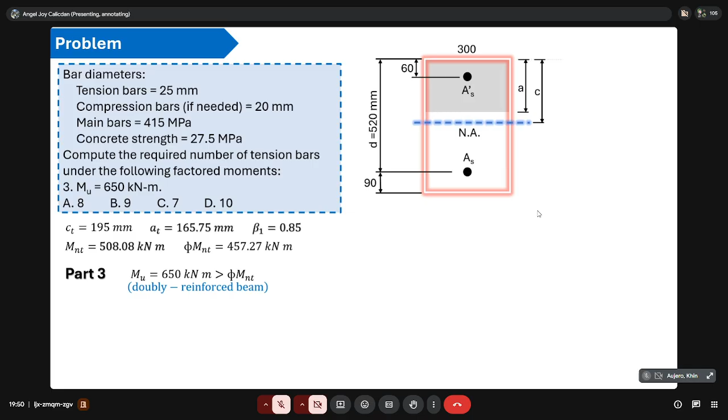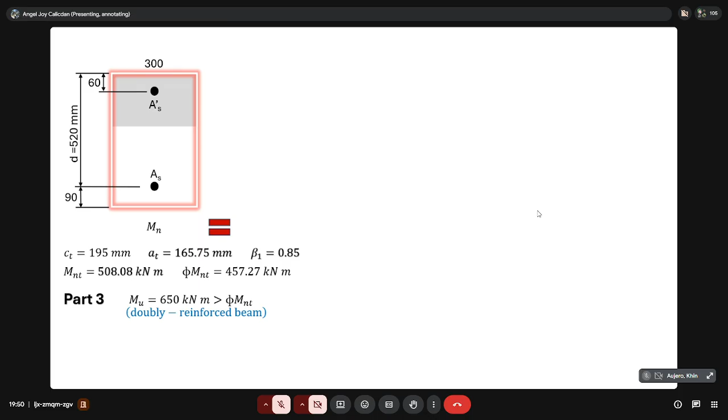For a doubly reinforced beam, given this cross-section of the beam, Mn, the nominal moment capacity, is equal to Mn1, which is just equal to Mnt, the tension-controlled moment, plus Mn2, which comes from the combination of As2 or As prime. But first, let's solve for Mn.

Since Mu is less than or equal to phi Mn, if we solve for Mn, we divide both sides by phi. So Mn is just Mu over phi: 650 over 0.9, and Mn equals 722.222 kilonewton-meter.

At figure 1, summation of horizontal forces: Cc equals T1. So we have 0.85 f'c times a, since tension-controlled throughout figure 1, times BW equals AS1 Fy. Fy is automatic here in figure 1 since it's tension-controlled, and tension-controlled means the steel yields.

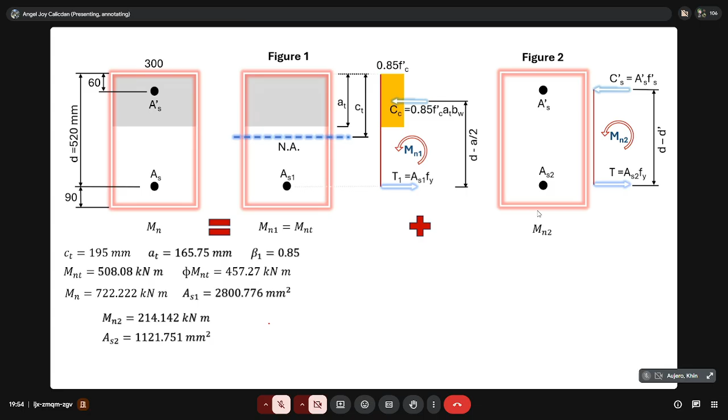But now for the compression bars, since it's doubly reinforced, we need to check if the compression bars actually yield. So to check, let's compute for Fs prime. Fs prime is 415.385 MPa, so it's just barely enough to yield. So we use Fs prime equals Fy.

Here in figure 2, summation of horizontal forces, to get AS prime: CS prime equals T2. Since Fs prime yields and equals Fy, and both sides have the same Fy, we cancel them out. So AS prime is just equal to AS2.

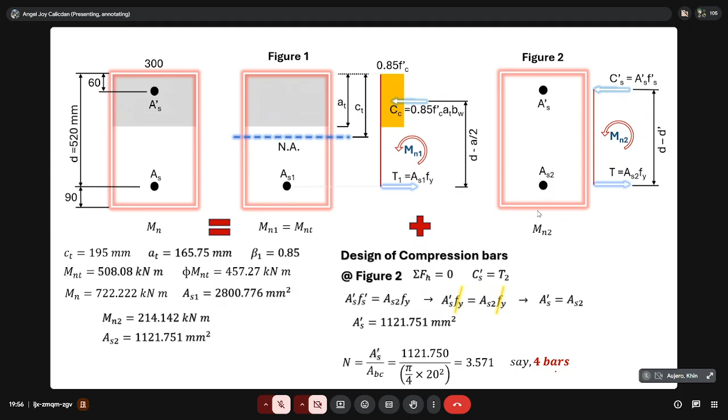And AS2 is 1,121, divided by the area of a bar to get the number of bars, let's say 4 bars. Those are the compression bars.

So that's it for RCD flexure. Next topic is shear, RCD shear.

For each applicable factored load combination, design strength at all sections shall satisfy phi Sn greater than or equal to U. So the design capacity must be greater than or equal to the ultimate capacity, applicable to moment, shear, torsion, or axial force. The design value must always be greater than or equal to the ultimate value.

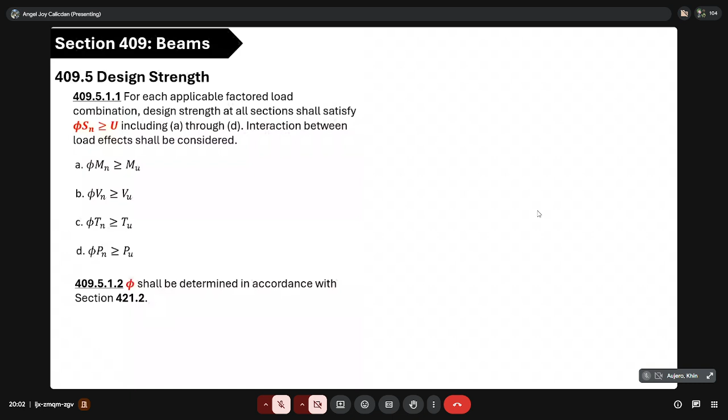And phi, or the reduction factor, shall be determined in accordance with section 421.2.

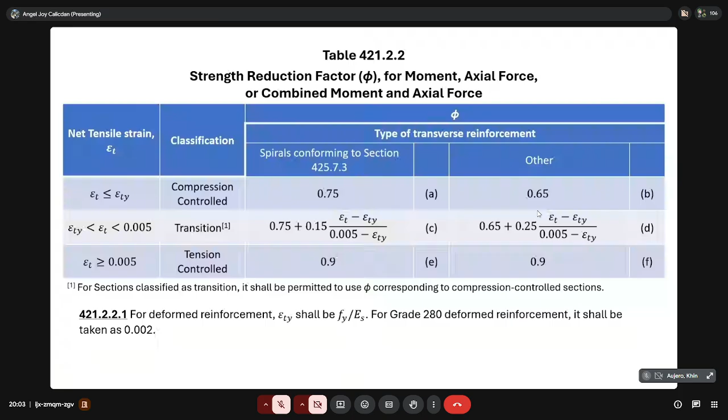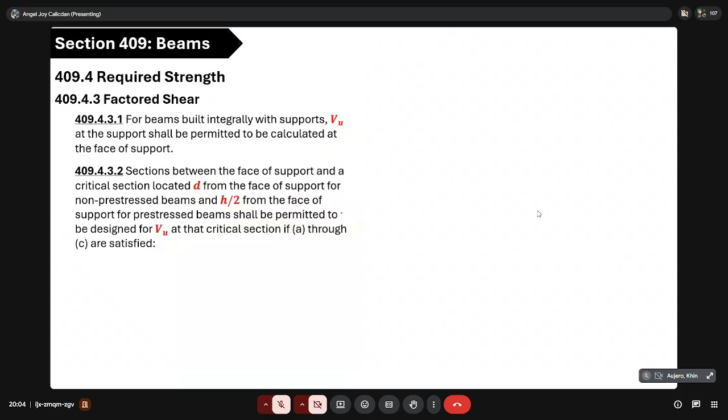The support reaction in the direction of applied shear introduces compression into the end region of the beam. Loads are applied at or near the top surface of the beam, and no concentrated load occurs between the face of support and the critical section.

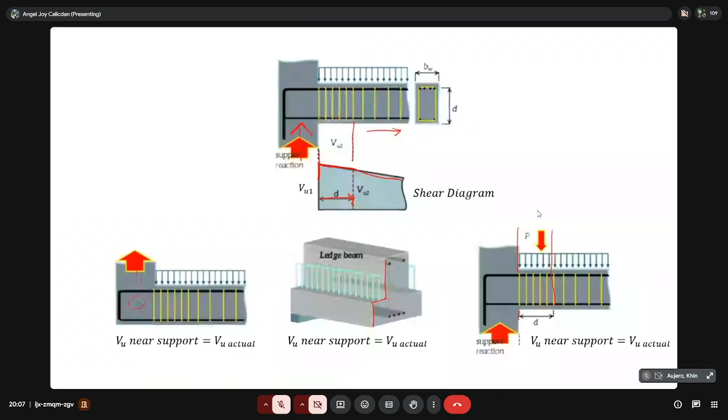So for one-way shear strength, the nominal one-way shear strength at a section Vn shall be calculated by Vc plus Vs. Cross-sectional dimensions shall be selected to satisfy equation 422.5.1.2.

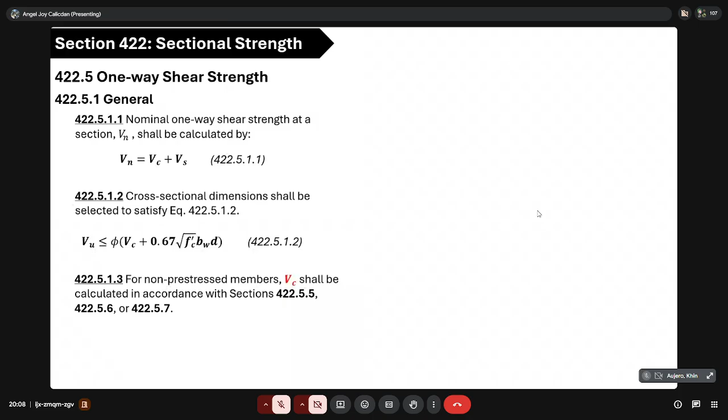For non-prestressed members, Vc shall be calculated in accordance with sections 422.5.5, 422.5.6, or 422.5.7.

For non-prestressed members without axial force, Vc shall be calculated by 0.17 lambda square root of Fc prime, BW, D.

And earlier was without axial force, so that's what you apply. And if there is axial force of compression, this is the formula: 0.17 times 1 plus Nu over 14 AG, times lambda square root of Fc prime, BW, D.

Unless a more detailed calculation is made in accordance with Table 422.5.6.1. And the sign convention for Nu, the axial force, is positive if compression.

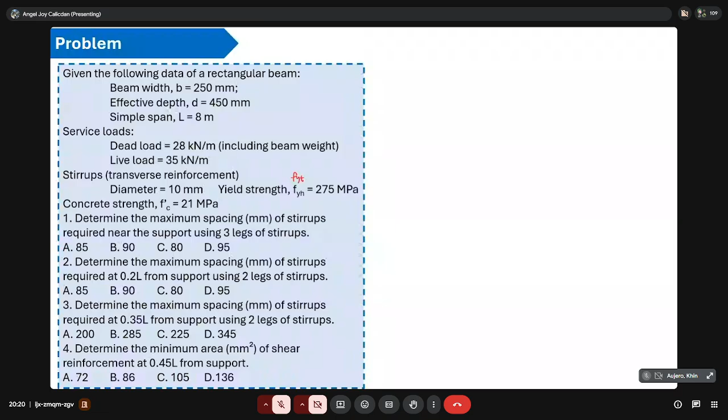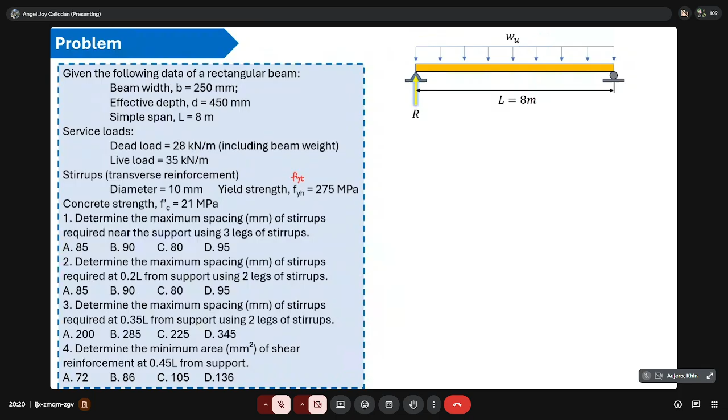So, simple span, simple support with pin and roller, uniform distributed load denoted by WU, and span of 8 meters. We'll solve for the reaction.

But first, let's get the factored total uniform load. The load combination we'll use is the common one, which is 1.2 dead load plus 1.6 live load. Substituting the given values, we have a total uniform load of 89.6 kilonewton per meter.

Now that we have it, we can solve for the reaction. By symmetry, since it's symmetrical, the reaction here is the same as the reaction there. So, W times L, divided by 2. So the R is 358.4 kilonewton.

If we draw the shear diagram, since it goes up, we have 358.4, then also 358.4 here.

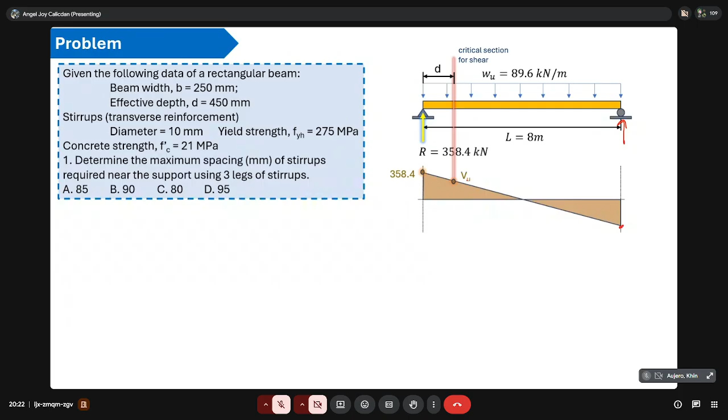The critical section, from the face of the support at distance D, is the critical section for shear. That gives us the equivalent VU. To get that, we cut at the D distance. So this is what we see. Since we cut there, we have an internal force VU.

To get VU, we sum forces vertically. So VU plus W times D minus R equals 0. All downward is positive, upward is negative. So isolating VU and substituting the R we got, and WU.

The effective depth is 450 mm, convert to meters: 0.45. And we have VU equals 318.08 kilonewton.

And we can solve for the shear strength provided by concrete. Since the shear strength comes from the concrete VC and VS, we add them multiplied by phi, equal to VU. So VC is 0.17 lambda square root of FC prime times BW times D, as per the code.

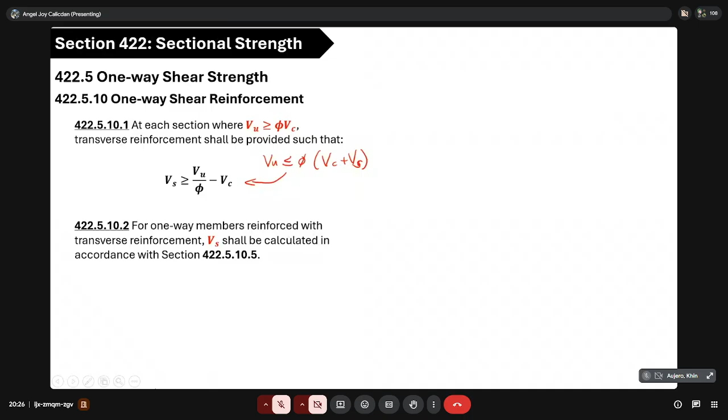So phi is 0.75 for shear, times VC which is 87.64. So phi VC is 65.73 kilonewton, and VU is bigger. Therefore this formula is applicable.

VS equals VU over phi minus VC. This also means, according to the code, if VU is greater than phi VC, there must be shear reinforcement.

So VU 318.08 over phi of 0.75, minus 87.64, is equal to 336.47 kilonewtons.

From the code, the formula VS is AV times FYH times D over S. Rearranging to isolate S, we have AV FYH D over VS. AV is the area of the shear reinforcement, and the diameter of this shear reinforcement given is 10 millimeters.

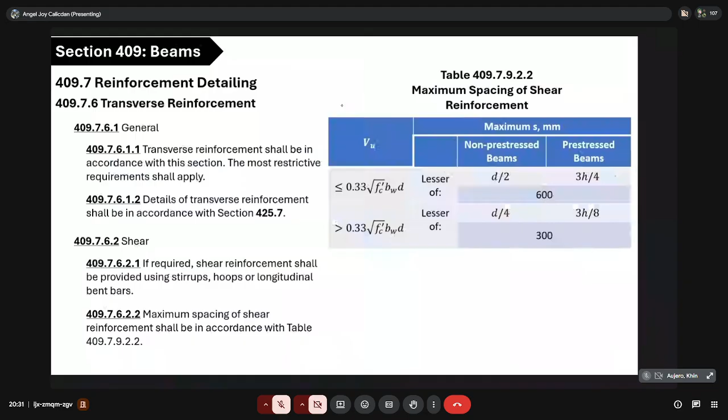But we always have to check the maximum spacing. So according to the table earlier, we compare it to 0.33 square root of FC prime times BW times D, to determine if we use D over 2, 600, or D over 4, 300.

0.33 square root of FC prime BWD is equal to 170.13 kilonewton. Since 336 is greater than 170, therefore between D over 4 or 300, the smaller governs. Since D over 4 is smaller, S max is 112.5. Compare your S max to the actual spacing you solved, and choose the smaller. It's stronger if stirrups are closely spaced rather than widely spaced. So our final answer is 86.65 mm.

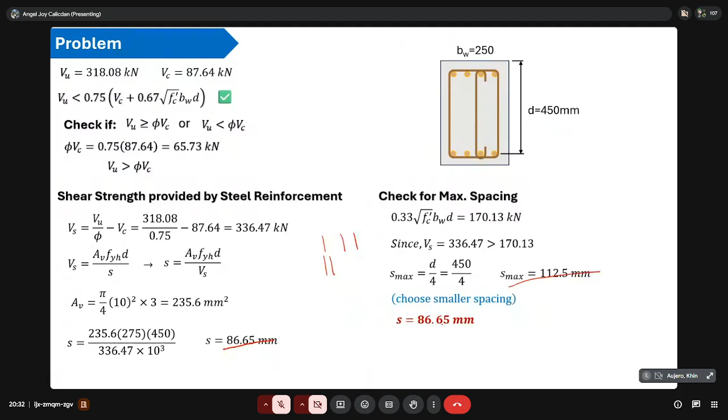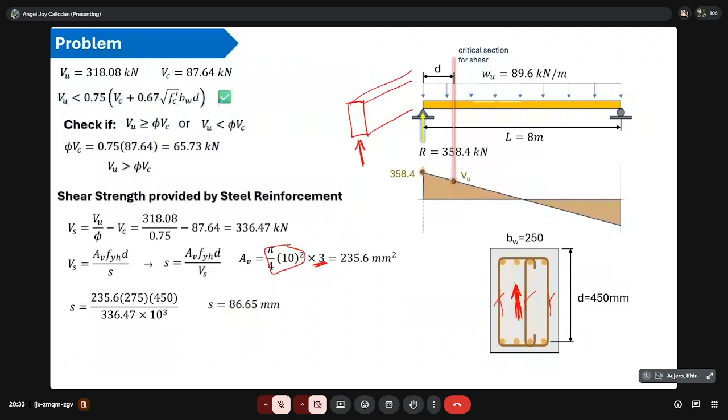Next, determine the maximum spacing of stirrups required at 0.2L from support using two legs of stirrups. In problem 1, it was indicated that maximum spacing is required near the support, that's why we got the distance to that critical section, and it was mentioned how many legs to use, which is 3 legs. And here's problem 2.

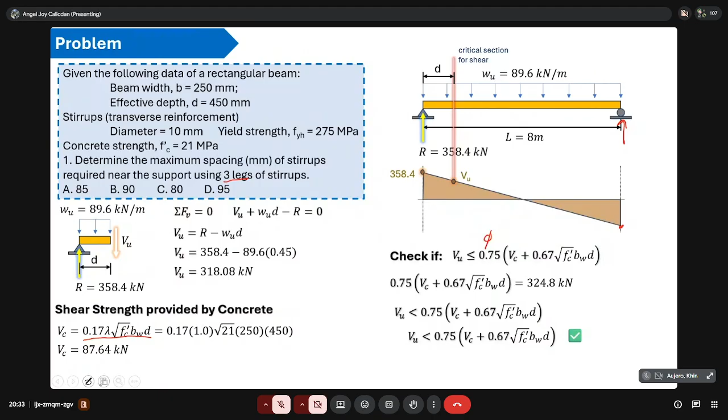We determine the spacing at 0.2L, not at the critical section, indicated with 2 legs of stirrups. VC and phi VC are the same as in part 1. And we check if shear reinforcement is required.

So for part 2, we measure 0.2L, which is 0.2 of 8 meters, and we'll use its VU. We cut here to get VU. All downward forces are positive and upward negative in the vertical force summation. Rearranging to get VU, we have R minus WU times 0.2L. Substituting R, WU, and the length of 8 meters, we get VU equals 215.04 kilonewton.

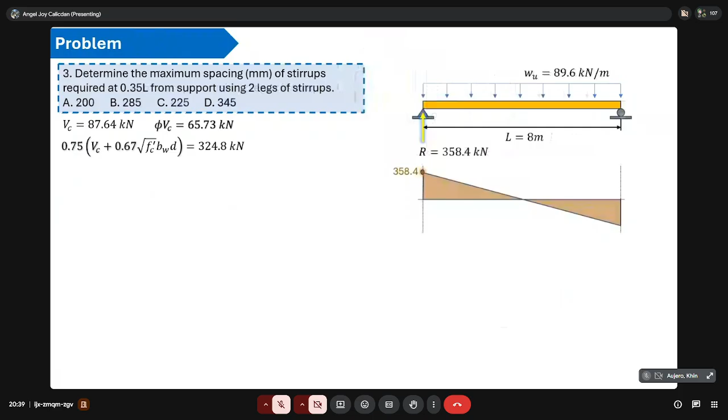For part 3, the location where we get VU is different now, at 0.35L. So here we cut again. To get VU, we sum forces vertically, with downward positive and upward negative. Rearranging to get VU: R is 358.4 minus 89.6 times 0.35 times the length of 8 meters. So we get VU equals 107.52 kilonewton.

We compare this to check if our dimension is okay, and if we need shear reinforcement, we compare VU to phi VC. Since it's greater, we need shear reinforcement, so we use this formula.

VU is 107.52 over 0.75, minus VC which is 87.64, so we have VS equals 55.72 kilonewton.

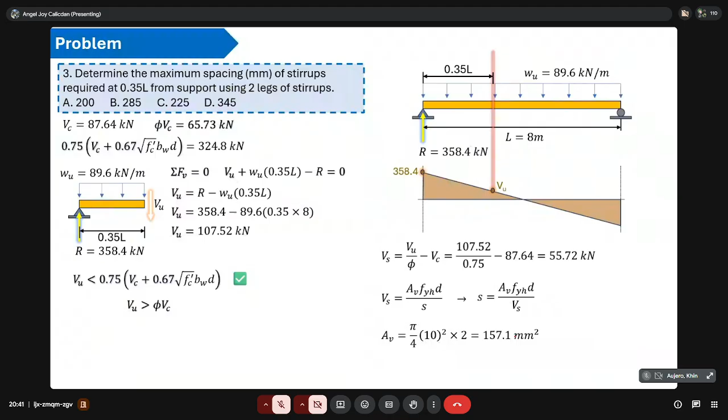Using the same formula, rearranged to get S, and given in the problem that it's 2 legs of stirrups, we multiply by 2 for the area of shear reinforcement. So AV is 157.1 square mm again. Substitute all the values: AV 157.1, FYH 275, D is 450, and VS is 55.72 times 10 raised to 3 to convert to Newton, and S is 349 mm.

Again, check for max spacing. 0.33 square root of FC prime BWD is 170.13. Since VS is smaller than that, the applicable limit is D over 2 or 600, whichever is smaller. 225 is smaller than 600, so your S max is 225.

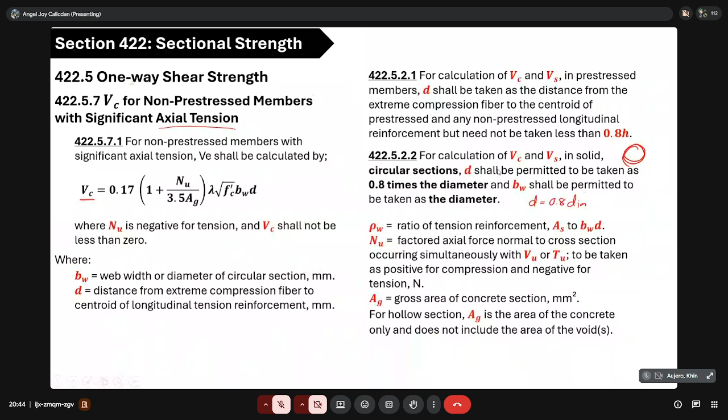And katong sa code earlier, so if in between, so kung ang imong VU kay less than or equal sa φVc, need nimo mag-compute for minimum area of shear reinforcement. So, we'll use this non-pre-stress beam type, and Av,min is greater sa kaning A or kaning B.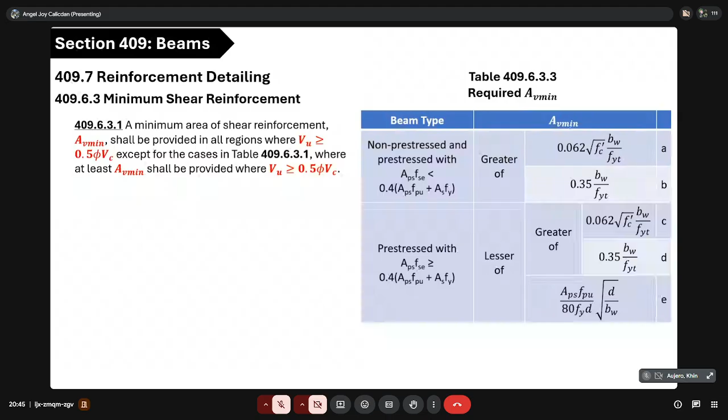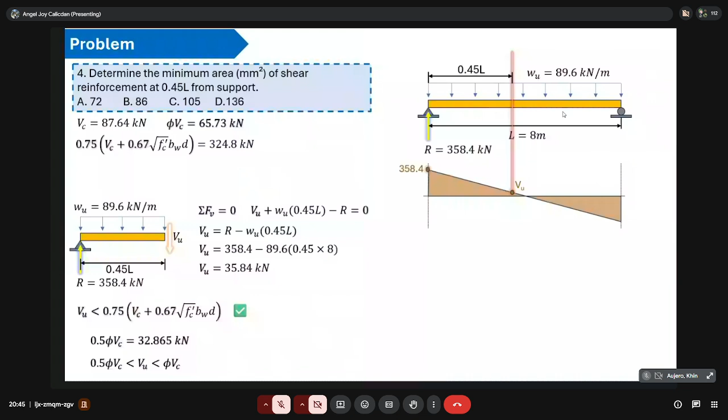So, balik ta sa problem (let's go back to the problem). So, we need to solve for Av min, which is greater of the two.

So substitute given FC prime, beam width, of FYH, and ang greater sa ila kay 0.318 mm. So kung i-try nimo, kung i-try nimo sa Canon pwede ra tong max na function kay greater man.

0.062 square root of FC prime, FC prime na 21, times 250 over 275, comma, 0.35 times 250 over 275. 0.318.

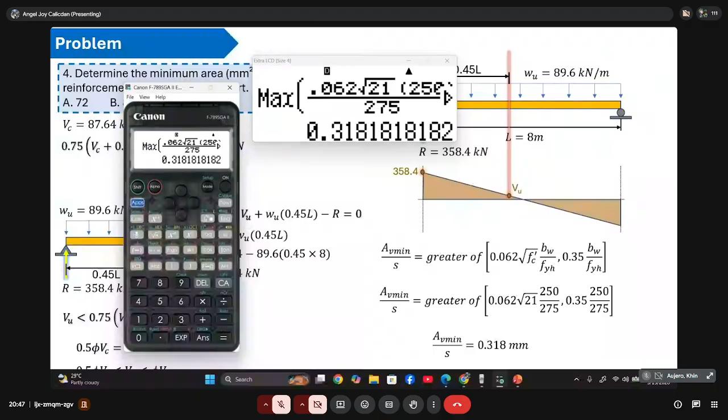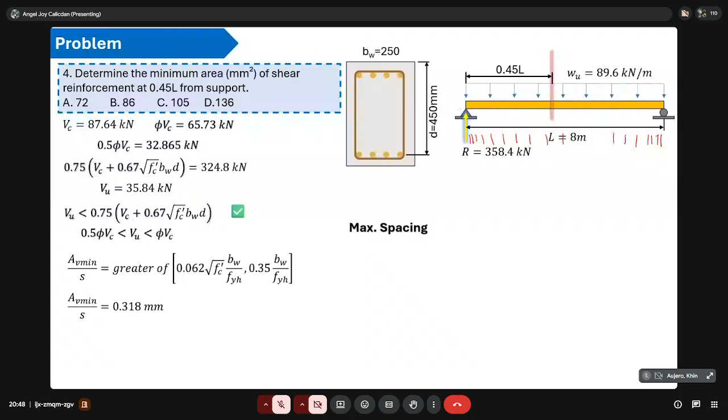So, since ang VU kay less than na siya sa phi VC, di ba na-notice ko na to ganina na diri dapit sa support close ra ang spacing, and diri sa hapit na maglayo-layo magkalayo-layo pod ang iyang spacing hantod mo closer na pod diri dapit sa support. So, ang gakaitabo in actual since ang kaning location kung asa ta nag-cut kay layo-layo na siya sa support. So, ang spacing niya sad kay lagyo na pod.

So, if magamit ka tong formula ganina sa katong S equals AVFYT, ano ba to, D over VS. Murag sure na murag dako na gid imong ma-compute na S ana (it seems your computed S will be too large).

So moingon sa code na if malapas na ka sa, kung ang imong VU kay in between ra sa 0.5 PVC o PVC, mo diretso na lang din ka sa max spacing. So max spacing is D over 2, and it is 225 mm. And kanin din na spacing imong gamiton para diri para makuha ang Av min. So, ang minimum na shear reinforcement is 71.6 square mm.

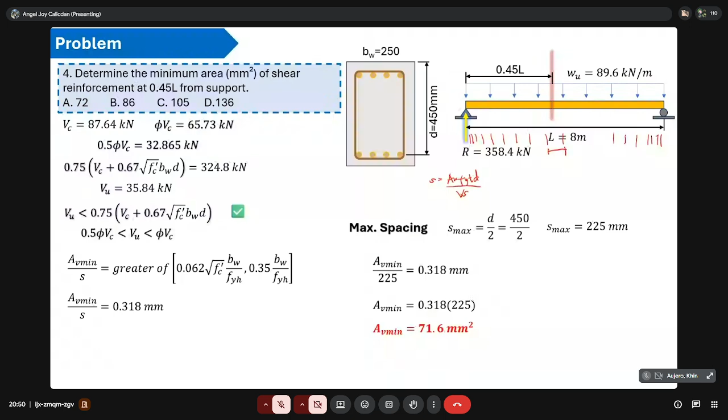So, letter A. So, answers of part 1 is A, 85. For part 2, 95. Part 3, 225. And finally, for part 4 is 72.

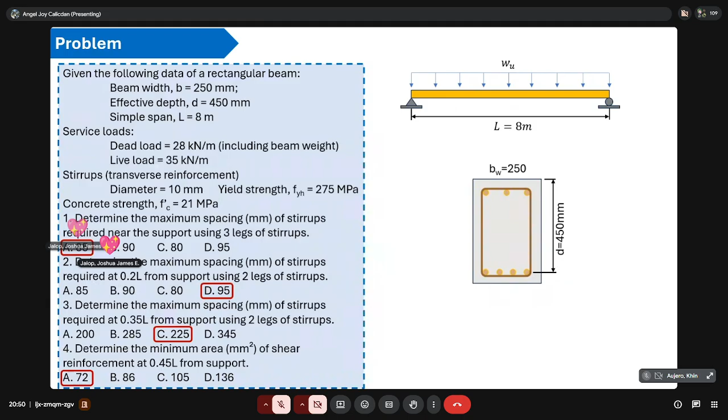So muna yung giingon kanina na dili mag-equal ang Fy ug Fyh napoy times na same. Pero dapat jud ka mag-careful kung unsay imong gamiton sa ila ato. And reduction factor is shear is 0.75.

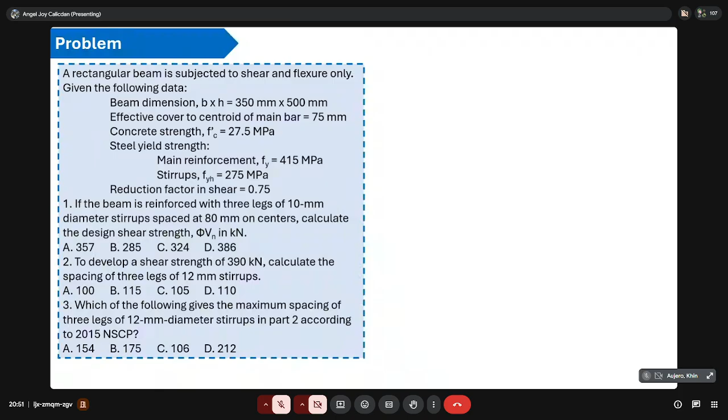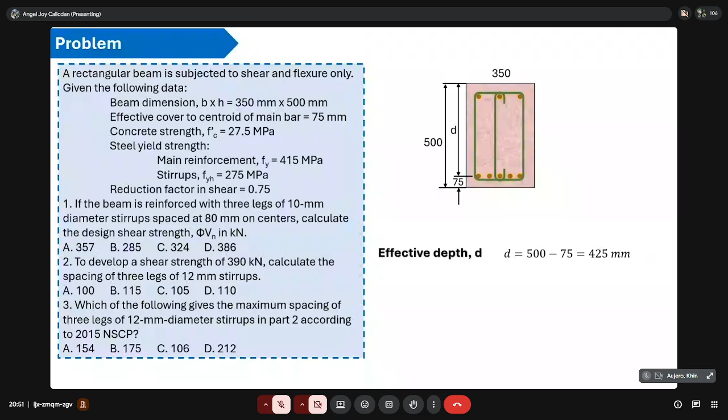So this is the cross section, 350 by 500. And effective cover is 75. So solving for effective depth D is just 500 minus 75, which is 425 mm.

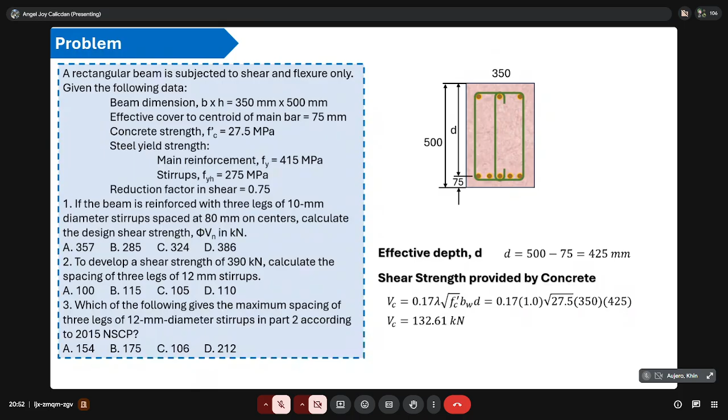And solving for the shear strength provided by concrete, 0.17 lambda square root of Fc prime BWD. So 0.17, lambda is 1, Fc prime is 27.5, BW is 350, and D is 425. So we have VC, 132.61 kilonewton. So if imong i-turn into another perspective, inani imong makita (this is what you'll see).

So for the shear strength provided by steel, Vs is equal to AVFYH D over S. And for part 1, ana siya na if the beam is reinforced with 3 legs of 10 mm diameter stirrups spaced at 80 mm on centers, so calculate the design shear strength.

So given na spacing, given na FYH, o na-solve na nato ang D, so mag-solve na ta sa AV. And indicated na 3 legs of 10 mm diameter. So area sa 10 mm diameter times 3 legs, and AV is 235.6 square mm.

So substitute, and calculating, we get Vs is 344.2 kilonewton. And check if adequate ang dimension. So since ang Vs kay less than ra sa 0.67 square root of Fc prime BWD, so okay ra ang dimension.

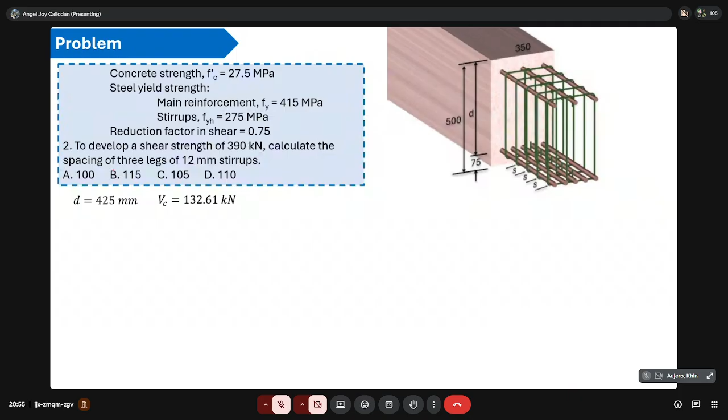For part 2, given shear strength of 390 kilonewton, we need to calculate the spacing of 3 legs of 12 mm stirrups.

So shear strength is just Vu equals to 390 kilonewton. And the design criteria is Vu should be less than or equal to Vdesign. So to get Vu, it should be less than or equal to phi times Vn, which is Vc plus Vs. If you rearrange to get Vs, you'll arrive at Vs equals Vu over phi minus Vc. So Vu is 390 over phi of 0.75 minus Vc of 132.61, and you get Vs equal to 387.39 kilonewton.

Check for the adequacy of the dimension. Since Vs is less than 0.67 square root of Fc prime BWD, it checks out.

Given the following data for the column section shown: dimensions B by H 450 by 600, main bars are 10 pieces of 28 mm diameter. FY is 415, ties are 12 mm diameter, FYH is 275 MPa. Concrete strength is 27.5 MPa, spacing of ties is 90, reduction factor 0.75, clear concrete cover to ties is 40 mm, and the factored axial load is 1,250 kilonewton.

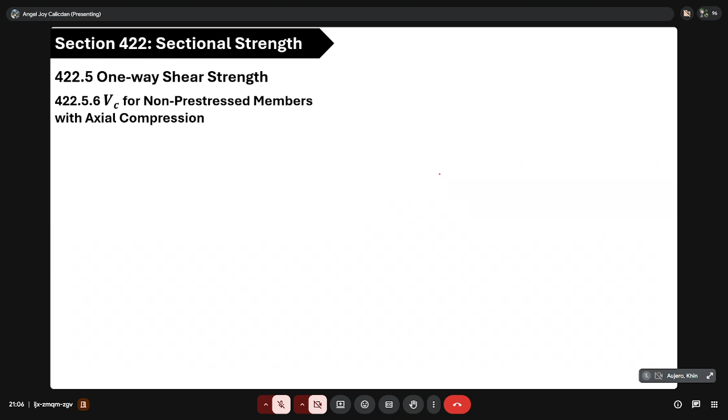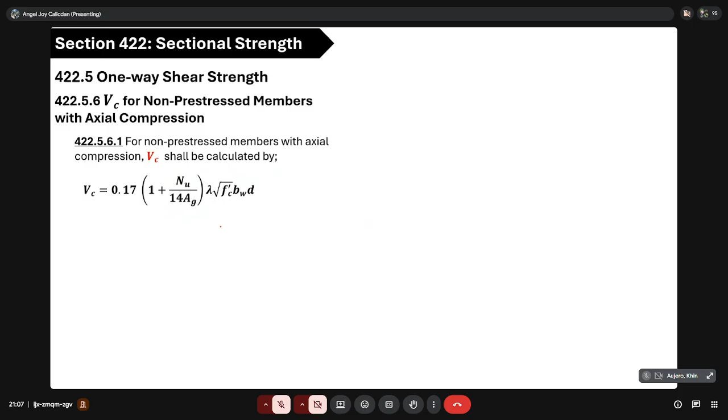So this is 0.17 times (1 plus NU over 14 area gross) times lambda, square root of FC prime, times BW, times D. So substituting, NU is 1,250 times 10 raised to 3 to convert to Newton, over 14, times the gross area which is the whole area - 450 times 600, the whole depth of the concrete, not the effective depth.

Then times lambda for normal weight concrete which is 1, times square root of FC prime which is 27.5, times beam width. Since along X the depth is whichever is parallel, then the beam width is whichever is perpendicular here. So that's 450, and your D or D1 is 534. So you get Vc is 285.07 kilonewton.

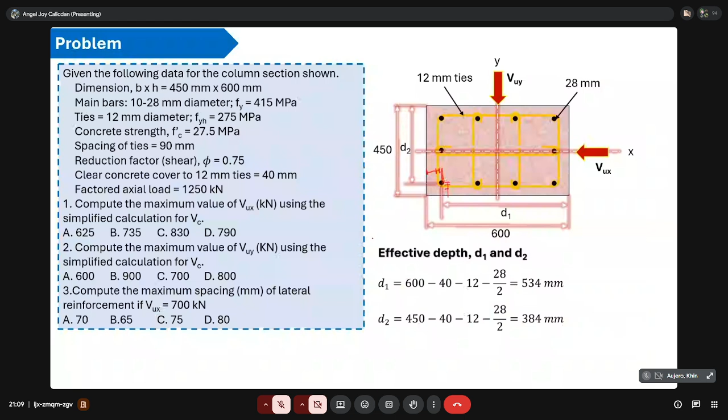And using the same formula for shear due to the steel reinforcement. In the problem, it doesn't say how many legs there are, but usually there's a drawing given. And since we're dealing with VUX, the shear aligns in that direction. If we count the legs, they should be parallel to the shear force. So parallel to VUX, we count 1, 2, 3. So 3 legs are used.

So AV is 339.3 square mm. Substituting, we have Vs equal to 553.6 kilonewton. And check again for the adequacy of the dimension - it still passes. Vs of 553.6 is less than 844.3 kilonewton.

So solving for Vn, it's just the sum of shear due to concrete and due to steel reinforcement. Vc is 285.07 plus Vs of 553.6, so Vnx is 838.67 kilonewton. Then what we're looking for is VUX, which equals phi times Vnx. Multiply by phi, 0.75, the reduction factor for shear. So we get 629 kilonewton as our final answer.

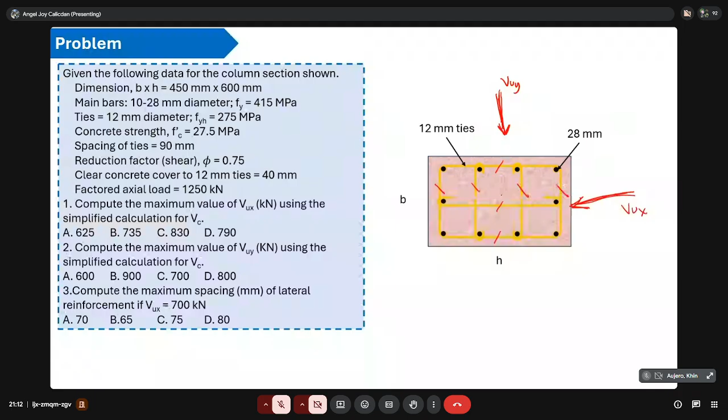So AV is 452.4 square mm. Substituting, we have Vs equal to 530.8 kilonewton. Again, it passes the dimension check. To get Vn, it's just Vc plus Vs, so Vny is 804.12 kilonewton. To get the final Vny, multiply by the reduction factor for shear, 0.75, and you get 603 kilonewton.

So the closest answer is letter A, 600.

For part 3, compute the maximum spacing of lateral reinforcement if VUX is 700 kilonewton. Since it's along X, we'll use D1 for the depth. So Vc is the same as part 1. Here it differs in Vs, since VU given is 700 kilonewton, so we'll use that: 700 over 0.75 minus 285.07 equals 648.26 kilonewton. Check this one - as always, it passes.

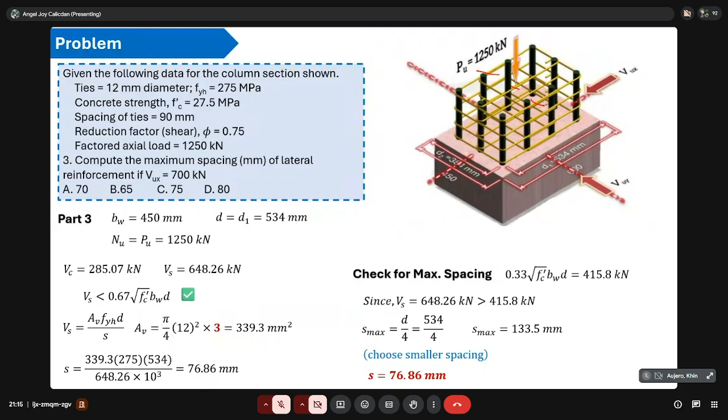And since along X, counting earlier along X, there were 3 legs parallel to VUX - 1, 2, 3. So AV is 339.3. Substituting to get spacing of 76.86 mm. Checking for the maximum spacing, since Vs is larger, we'll use D over 4 or 300, whichever is smaller. The smaller is 133.5, so that's the maximum spacing. Compare it to the solved actual spacing, and choose the smaller one. Our final answer is 76.86 millimeter, and among the choices, the closest is 75, letter C.